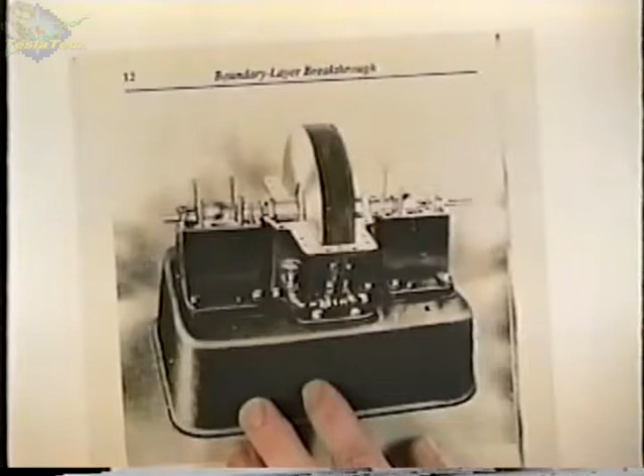In this photograph here, you see his basic turbine. This is out of the first publication that we put together. It was called Boundary Layer Breakthrough. That book was published in 1990. It was the very first book in English on the turbine. So in 1990, we started the resurrection process.

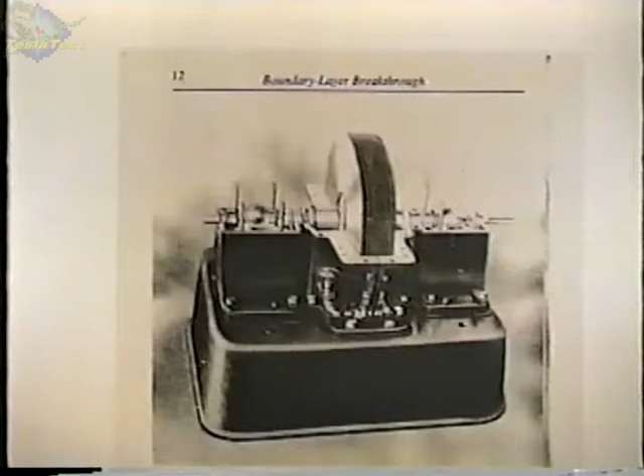We've since come out with a second edition of that, which is called Tesla's Engine. This was published in 1994. But basically, all a device is a series of disks.

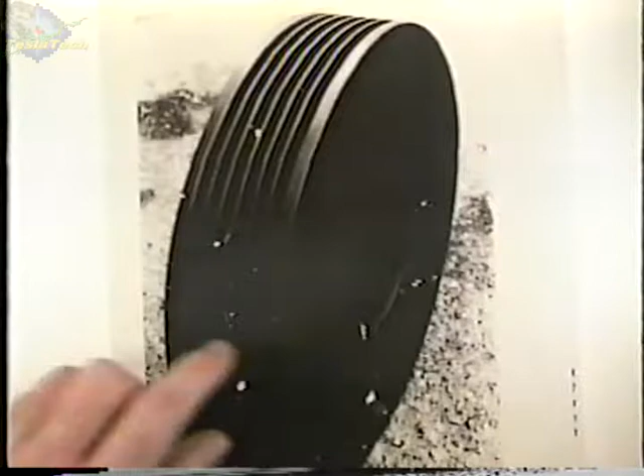You see here, this is a pump rotor, and there would be a shaft mounted on the back here, and the shaft is driven. You can't really see it very well here, but there's a hole right here.

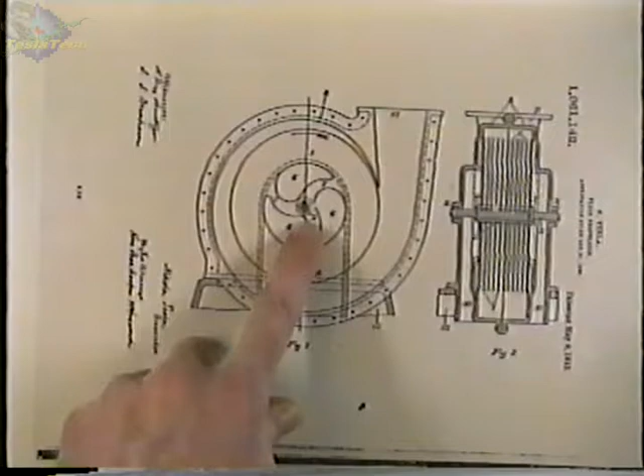In this case, Tesla has got these center spokes. These are almost never used in, well, they are never used in the industrial pumps. Why is this such a good industrial pump? Why is it the best pump that there is? There's no tight tolerances, that's true.

What's his main claim to fame? Does anybody know? It'll pump solids, right. It'll pump a solid, it'll pump a liquid, it'll pump a gas, all at the same time.

It's an amazing pump. The commercial ones that are available actually have the discs spaced apart that wide on some of the models, or wider, and it can actually pump solids that will fit into that hole. You can even pump fish. You can pump live fish. It's about any kind of solid will go through it.

There's a company by the name of Discflo that's the main action on this. They actually claim patent protection, incorrectly in my opinion, but their main patents have expired now, so there's really no more problem with that. But they've really taken the technology and proven it.

Matter of fact, Texaco claimed in 1988, when they started using this technology, that they were saving $68,000 per year per pump that they had replaced with this technology.

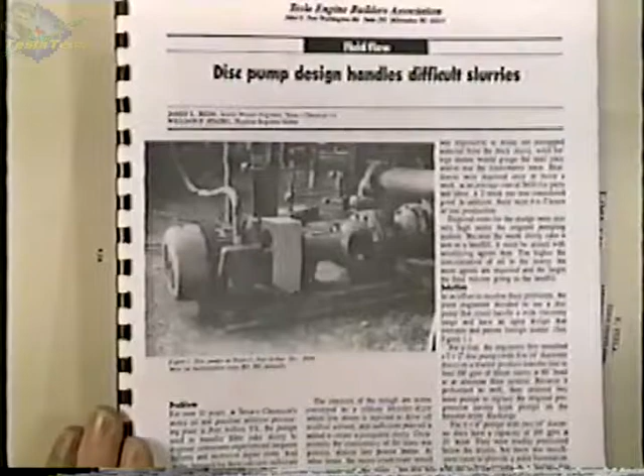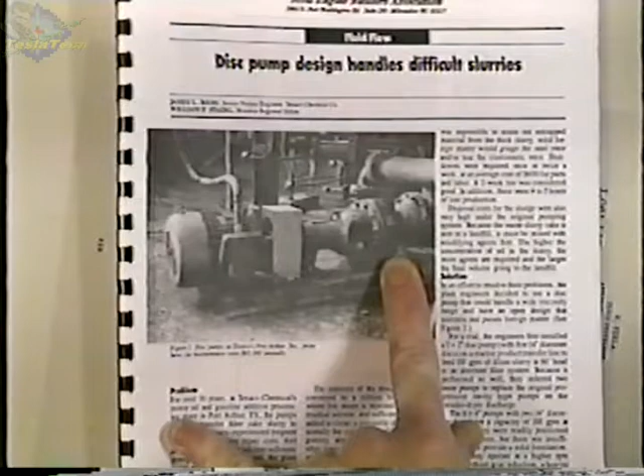This was in Chemical Processing magazine, and here you see the pump being electrically driven. There's a motor, it drives the pump. Previous to this technology, they had to replace these pumps on a very regular basis because they were pumping some of the nastiest stuff imaginable.

It would destroy their blades in their pump, because conventional pumps use blades. What else doesn't happen with this pump that happens in conventional bladed pumps? Cavitation. What is cavitation?

It's an implosion. Whenever you suck on something, what happens? The vapor pressure will... you're actually drawing a vacuum, right? And what happens when you draw a vacuum on a fluid? It starts to boil, right? If you go higher in altitude, what happens to the boiling point?

It goes down. So in these pumps, especially in applications where they have a high vapor pressure, that fluid will boil very easily with any kind of vacuum applied. When those bubbles form, the blade comes along, and what does it do to that bubble? It punctures it. Then all that stored energy that it took out of the environment in that boiling process is now released instantaneously, and that creates a tremendous implosion force that will eat away at those blades.

Every bubble that pops is eating until there's nothing left. So if you have an application where there's a high vapor pressure in your fluid, this is really the only pump that will survive, because cavitation will destroy any pump. Okay. Questions about pumping?

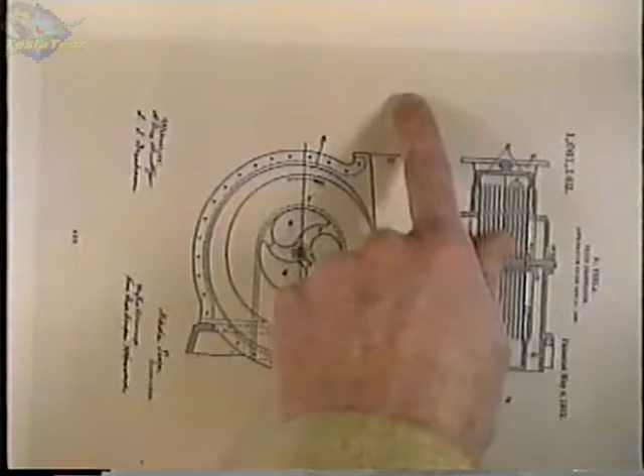So how does the turbine work as opposed to the pump? Well, the pump—go to the viewer—the pump sucks in the center. The fluid is accelerated in a spiral. It's thrown out by centrifugal force and comes out the outlet. So you drive the shaft, you have the sucking action through the center, and then it takes it out the periphery.

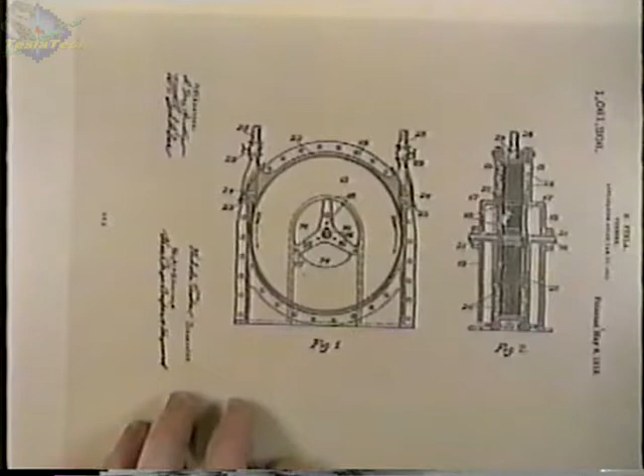And this is really all those guys went by. This is really all they had when they tried to make this device—they really didn't have any more than this drawing right here. But you can see in this, here's the nozzle coming in. High pressure fluid comes in here, vortexes around, and comes out the center.

Now there's two nozzles here. Why is there two nozzles on this? One is for reversing. On conventional bladed turbines, they'll typically have more than one nozzle, correct? They'll have nozzles all around. You can do that on this unit also, but Tesla never did that. He didn't have to. Why didn't he? Why does a conventional bladed turbine need multiple nozzles, but the Tesla turbine generally only needs one?

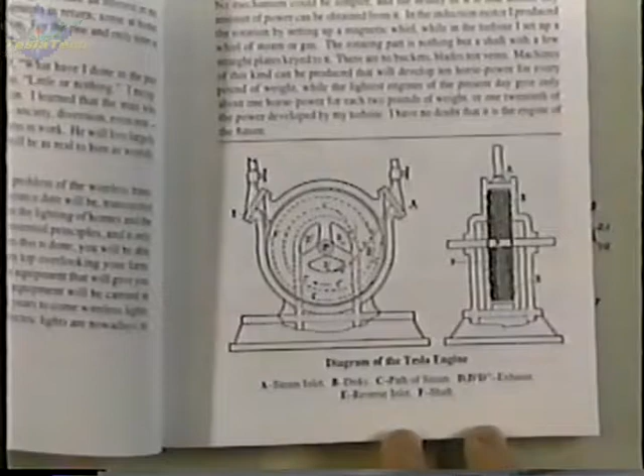In a way, but what's happening in there? You'll notice that the fluid comes in, it's going to vortex around in a circle and hit all areas of that disc. And if you're hitting all areas of the disc, do you want to have multiple nozzles? Because in the bladed world, what they do is put the multiple nozzles in there to get more action, because you're only getting action at one spot.

In the Tesla turbine, you're getting action all around. As it comes in, you get action spiraling around. It's a vortex, and it's just wringing the energy out. So there's two forces acting here. It's still acting as a pump, correct?

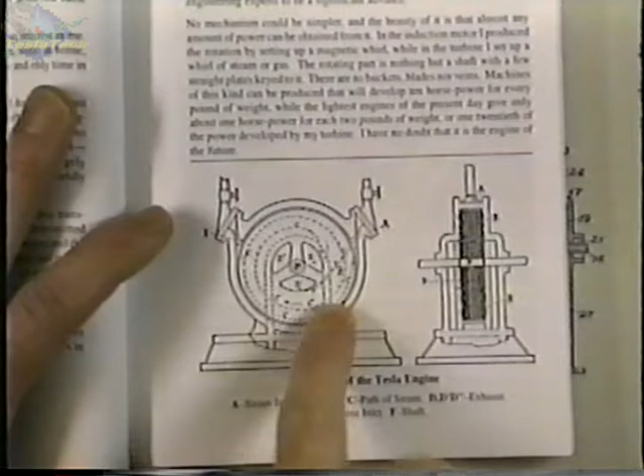It's moving around, so there's still centrifugal force trying to force the fluid out. But there's also fluid coming in trying to push the fluid in. Wherever those two energies meet is where the fluid is going to be. Right here you have high pressure at the periphery. As it loses some of its energy, it comes in to a lower point in the disc, where you have less centrifugal force, so it's always going to be in its appropriate spot. That's how the vortex works. You're always hitting all areas of that disc.

If you want to reverse, you simply close this valve, open this valve, and you instantly reverse. It's the only turbine that's reversible in that manner.

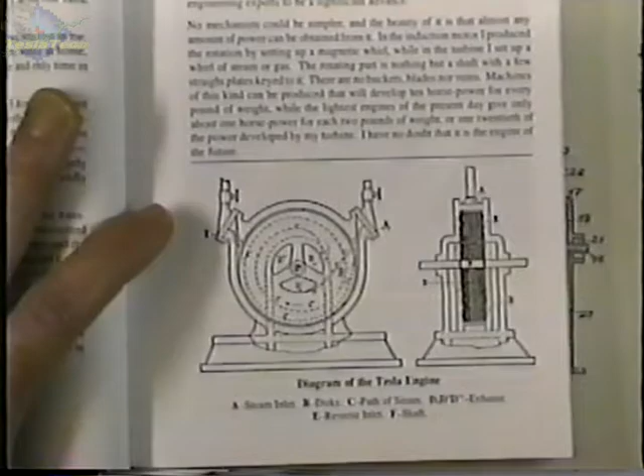With blades, you have curved surfaces. In bladed devices, the blades are curved, one after the other along that shaft. The fluid comes in and hits that curved surface. If you want to reverse the turbine, you're going to have to hit the opposite side, and that's not the geometry they want to hit, so it doesn't work.

In relation to the amount of head it can handle, and also compared to piston pumps, vane pumps, those kinds of things, how does it compare? The question is, how does this compare in providing pressure?

To get high pressures out of this device, you'd have to stage it. You have to actually go to multiple stage pumps if you want high pressure for pumping. And that's been done.

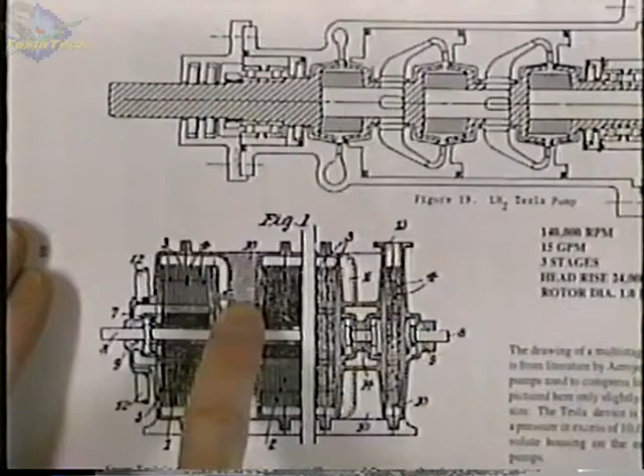Tesla actually got a patent for multiple stage pumping. You'll notice here that there are multiple stages. You go into one, it comes out, goes into the other, and so on. This empty spot means you can insert as many stages as you want.

Aerojet built one of these for pumping liquid hydrogen. Very similar, you'll notice - input here. Of course, they changed it; they took its center geometry out, it's just a hole there, but it comes in here and goes through the stages and comes out here. On this, they were able to get 140,000 RPM. This is just a 1 inch rotor, 15 gallons per minute, 3 stages, head rise to 24,000 feet at 1 inch diameter. So it can pump some pressure.

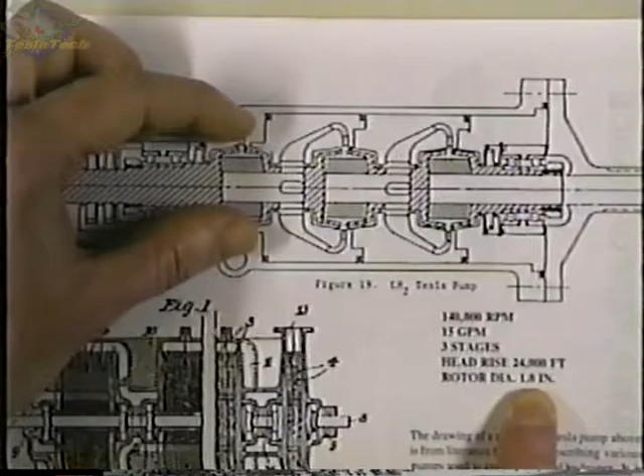Any other questions? How is the force transferred to the rotor? Is that purely friction of the fluid over the surface? Good question - how does the energy transfer from the fluid coming in to the rotor?

It's not friction. If you have friction, what do you have? Heat, and heat means loss. There's a professor at Arizona State University here in Arizona who did a lot of work on this - he was the premier academic looking into this, and he measured rotor efficiency. He claimed that the efficiency could be over 95%. Tesla claimed 98 plus. So it can be very efficient if built properly, and that's the key - it has to be built properly.

You haven't yet answered how the force is transferred. You're right, I haven't answered that question. The force is transferred by two elements. Here's a turbine disc, and the way this works is by adhesion and viscosity.

If I took a drop of water and put it on this plate, what's going to happen - is it going to fly away? No, it's going to stick. That's called adhesion - it has a relationship with that plate electrically, it wants to be there. It sticks, and it doesn't fly apart into separate pieces and stick all over the disc - it sticks together, it's not only attracted to the disc, it's attracted to itself. That's called viscosity - the more it sticks together to itself, the thicker it is. So it works by two concepts: adhesion and viscosity.

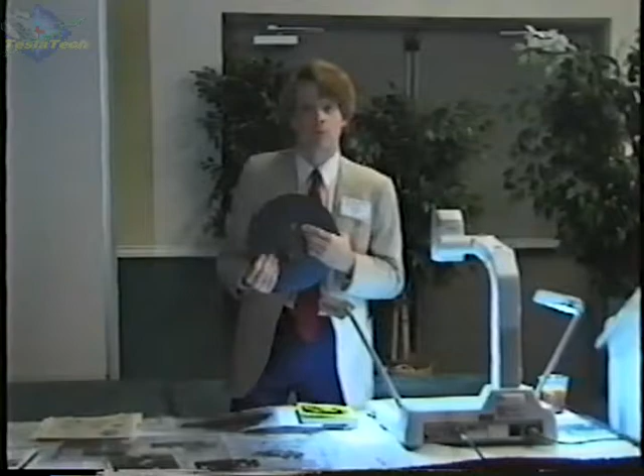Are you familiar with the work of Jake Bussell? I'm very familiar with the work of Jake Bussell. In fact, the first book I did, called Boundary Layer Breakthrough, was much related to his work. At that time, Jake was the only person really doing anything with turbines, not correctly. He was the person involved with that 1977 Conoco test that failed. I thought he had some very good success with geothermal. No, that's not true. I have the video from that geothermal test, and there was plenty of steam coming out of that well, but it went right to the turbine and it did not turn. I'll explain why. Is he still alive? No, Jake has passed away.

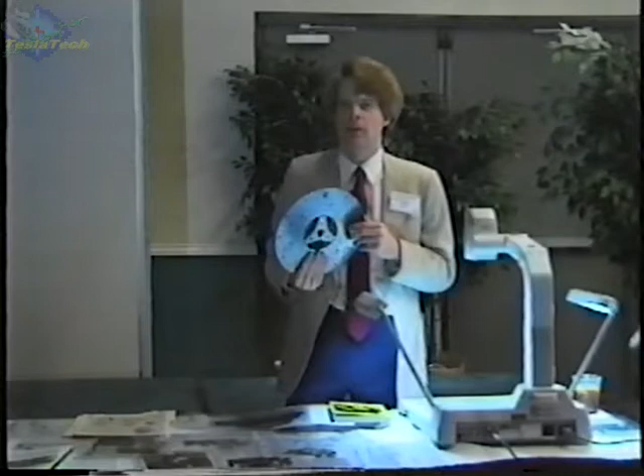I have to give Jake a lot of credit, though. Even though he didn't do things correctly, he was our inspiration. He was at the 1984 Tesla, was it? 86? At 86 he spoke at the Tesla Society, and that's what got me going. So I give him a lot of credit, even though he wasn't into Tesla. That's the problem — the only success that's been had on this is when we go back and give up our ego and say, okay, I don't know anything. What did he say to do? Unfortunately, that's not the way people have approached it. He also worked on a jet engine and compressors using the same technology. Yes, he was working on jet engines, and none of that worked. None of that worked.

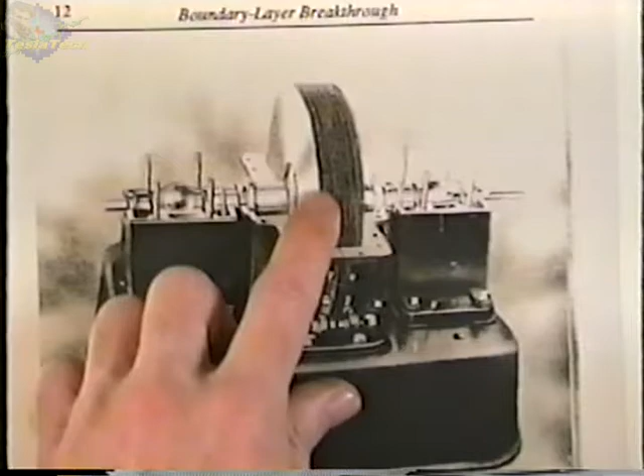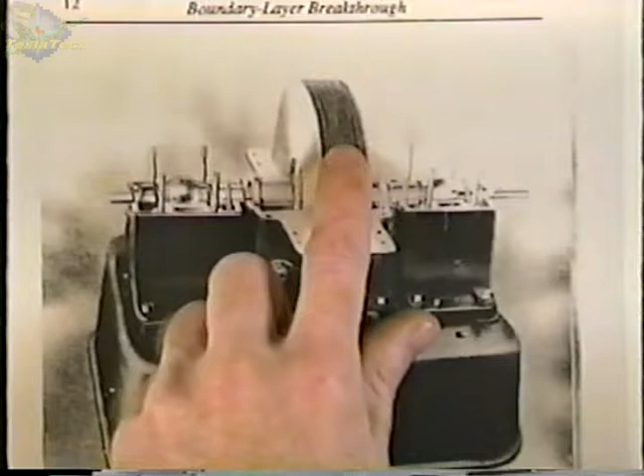Why? Good question, we're coming to that. Why did Jake not succeed? These little holes are one of the reasons he did not succeed, amongst other things. But you'll notice here that there's a pattern, a bolt pattern around here. And when these discs are put together, it's not real obvious — go to the overhead, please — it's not real obvious that these geometries exist if you look at the pictures, because they've been polished out. Remember, you want these discs to be as smooth as possible. Not that it would matter on the end disc so much, but you can't see them. In there is a series of these pins, and there's bolts that go through here. This thing is actually all bolted together.

When this turbine is started, if you don't put pins in, some things happen. For one, it has no starting torque whatsoever. The maximum torque on this thing is developed when the speed of the disk turning is half the velocity of the fluid coming in — that's maximum torque. In other words, you could have this lightly loaded, and this thing will spin up to whatever speed is coming in. So if you're putting in 2,000 feet per minute steam, this thing will run up to 2,000 feet per minute peripheral velocity. Now, if you load it, what's going to happen if you don't increase the fuel supply? Fuel supply is kept constant, you put a heavier load on it — what happens? It's going to slow down.

Well, it's going to keep slowing down. But as it slows down, it fights back. It keeps trying to turn that thing harder and harder. It resists it, because what's happening is you're developing additional torque. As it slows down, the torque goes up. So it tries to self-regulate itself, it tries to get back up.

But when it finally hits 1,000 feet per minute, what happens? It gives up. The torque curve just drops. So the torque keeps increasing, increasing, increasing, and you get to 50% velocity, and boom, it just drops off. It stalls, which is not a problem because what would you do with the fuel supply? As the load increases, you increase the fuel supply to maintain the RPM, like any other turbine.

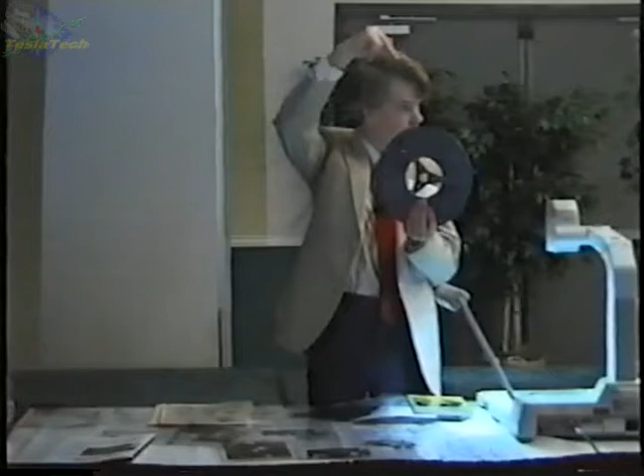In this, what happens? It's also going to be a pump, and there's centrifugal forces coming out as well as centrifugal forces coming in, right? They're going to match, and when it hits 2,000 feet per minute, it's got as much pressure going out as it's got coming in. So what happens? It self-regulates at that speed, it never runs away.

It's much like a DC motor. You know how you give a DC motor 50 volts, it will go one speed. You give it 100 volts, it'll go twice as fast. You don't have to worry about having a load on it that it's going to run away. It's the same characteristic. Although on a DC motor, if you have no field and no load, it will run away because there's no counter voltage. But it's very similar to a DC motor in its torque characteristic and its speed.

But you said something about it won't start. Exactly, thank you for getting me back on track. The pins here give you that element of starting torque. These pins now act as an additional torque-producing element in this turbine, and they're essential. If you don't have these pins, you will have drastically reduced performance.

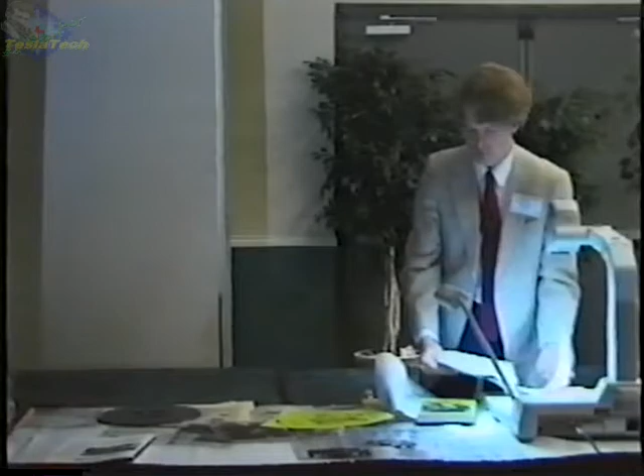What happens on these pins has been recently uncovered here in an article, the overhead please. This is an article called The Physics of Tesla Turbine, which was in one of our recent newsletters. And this is Sonny Intrican here, who is the premier turbine builder at this time. He has really been instrumental in getting this into the commercial market.

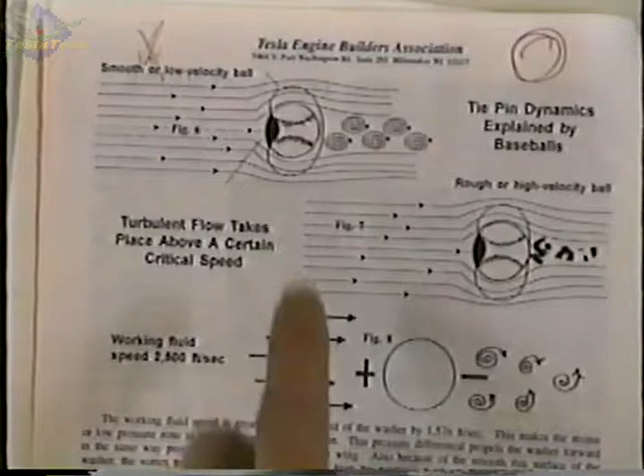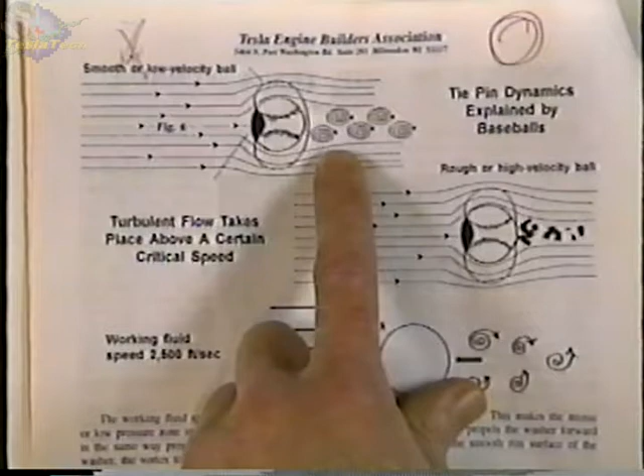But anyway, he's looked at this and he says, well, you know what those pins do? They're much like the physics of baseball. When you have a baseball going through the air, what happens is you get these vortices formed on the trailing edge. And these vortices actually are imparting torque to the discs.

So they're actually a torque-producing element in the disc. And when you have a starting condition, you aren't going to have any torque from the disc, so you need those pins. And with those pins, it has tremendous starting torque. You could take your hand and put 100 pounds of pressure on that turbine, and you can't hold it back. So it does have starting torque.

What happened in that Conoco geothermal test, when they had the steam blowing through it, there were no pins. So there was no torque. That was one of the problems.

As long as you reduce the load, you wouldn't need a starter, it'll self-start. You could have, and that's actually in that Conoco test - you see a guy went over and took the load off and hand cranked it, and it did start. But there were other problems.

Do the pins affect the efficiency? Yes, without those pins... increase the efficiency - you're increasing the torque transfer from the fluid to the discs, to those trailing vortices.

A lot of people think the pins would be in the way. Tesla thought so too at first. If you look back at his original documentation and know what you're looking for, he didn't explicitly say to put pins in - that was one of his secrets. I think he was trying to keep that to himself because the patent drawings don't show it either. But if you read how it progressed, how suddenly there was a huge increase in performance and efficiency, that's when he added the pins.

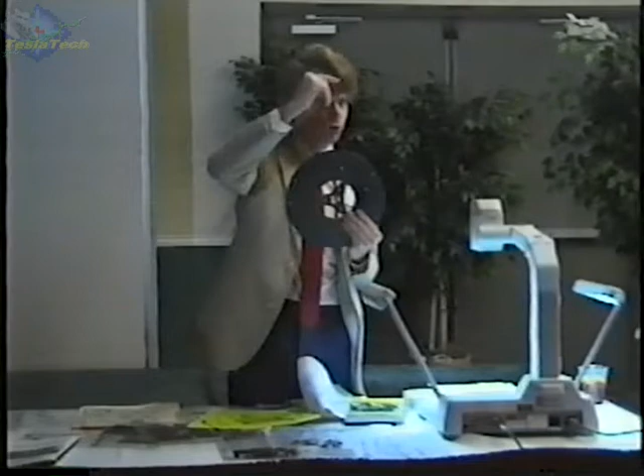It's a different geometry of fluid flow. You have vortices forming in the trail end, not just random turbulence. It's not a random effect, and it's not like sticking blades in - you could do that, but then you'd have a bladed device. The pins don't get in the way; there's still enough room for the fluid to vortice around. You can't have the pins too close together either - that's a mistake. Some people think if some pins are good, let's add more, but it doesn't work that way because you need that action area behind it to get the effect.

How do we know how many pins to use? Because we just follow Tesla's drawings. So you might ask, if he didn't put those in the patent drawings, how did we know what was going on? Well, it turns out he had buried that information in the National Archives in the patent wrappers. When we dug those patent wrappers up and looked - I was sitting down trying to make CAD drawings to reproduce these turbines.

I was looking at the patent wrappers and the drawings. They're called assembly drawings, which actually show the pieces that were put together. And lo and behold, I'm going, what is that? As I looked closer and closer, I realized those were pins. Once you knew what you were looking for, it became obvious, but everyone had missed it until we came along and discovered it.

Once we realized that was one of the missing things, we drew our drawings out. We just had faith at that point that Tesla was on the money - he believed in this, so we were going to try to follow through and make it work. We put the drawings out and said, anybody want to build this that's a machinist? We started the Tesla Engine Builders Association in '93, and put out a membership manual that included the drawings - a 90-page manual that's been updated since.

It said somebody's got to build this. So these guys down in Louisville, which included Sonny Intrican, who I mentioned earlier, got a hold of this. Back to the overhead, please. And they built a turbine. Their company name - Sonny's company has been through a lot of machinations, but it's called Intravac.

He's a turbine vacuum pumping expert, so he's a perfect fit for this. I came across another website - I'm not sure if it was them or another - that claimed they made some important improvement. Oh, Frank Germano. Yeah, company name GermanoIndustries.com or something like that. He was a member, got the information from us, basically. He's talking about some new information that's come out, which I'll talk about in a minute.

This is an actual disc out of the 11-inch turbine we have on the overhead. Back to the overhead. You can see this disc right here is actually a template for the discs. The discs in this turbine are a 32nd thick; this one is more like over a 16th. What they did is they wanted to save money because getting the disc laser cut with all these individual holes would have tripled or doubled the price. So they made this template, put it on the disc, and used the drill holes as a guide. Once they were done, they gave me their template.

But this turbine you saw on the overhead is a high-power turbine. It's got 34, I think, discs in it. It's way overbuilt - it's a 1,000 horsepower turbine if you could get the volume through it, with a minimum of 250 horsepower.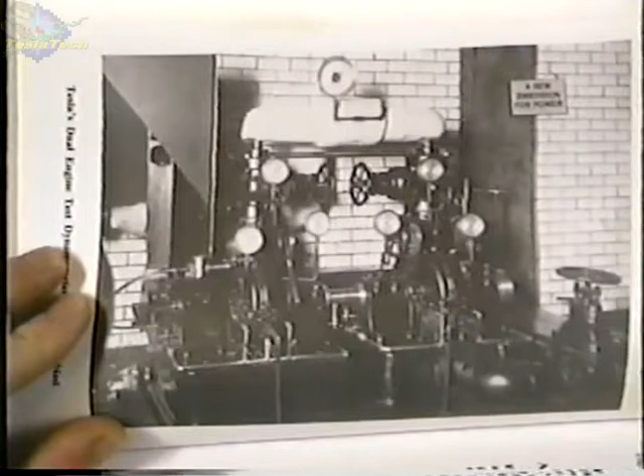Here's a picture of it with the covers installed. You notice these handles here? One's up, one's down — those are the reversing handles. So if you want to reverse the turbine, you can reverse these on the fly, making one the driving and one the driven right on the fly. And of course, the spring between here will twist depending upon the amount of differential in speed and torque between the two, right?

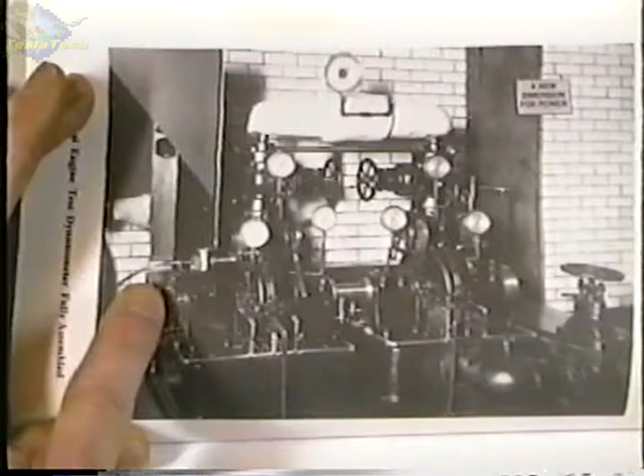Now what he did then, over here he has a light beam. See up here he's got this light source, that shines down and goes onto the shaft. It will go off the shaft into a mirror, come back off a series of mirrors and come off this other side here. That would come off then onto a calibrated piece of paper, and when it's not running, you calibrate that beam so it's at zero.

As that spring twists, what's going to happen to that light beam? You got a mirror mounted here, and you've got a reflection off of here. As the spring twists, it's going to shift. So you're able to read horsepower, and as long as you maintain the speed constant, you can read the horsepower directly off the scale. Tesla's the first one that ever made a dyno like that, to my knowledge, but he needed to get accurate readings, and this is the way he did it.

This turbine developed a maximum of 330 horsepower under test, and the limitation was the steam supply. Also, these were old cast housings — he was afraid that these castings where the steam came in would give. So he was afraid to take it up above 185 pounds of pressure. At 185 pounds of pressure, it was developing 330 horsepower. When he ran it at lower pressures, down at around 125 psi, it would develop 200 horsepower.

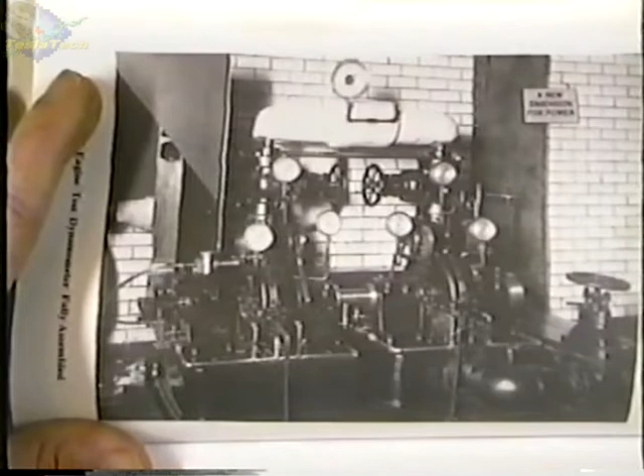And that's with a free exhaust — that means there's no vacuum, there's no condenser on the exhaust. You always have better performance with a condenser. But with 125 pounds at the nozzle, free exhaust, he was developing 200 horsepower, and that's where he rated it. He rated everything very conservatively.

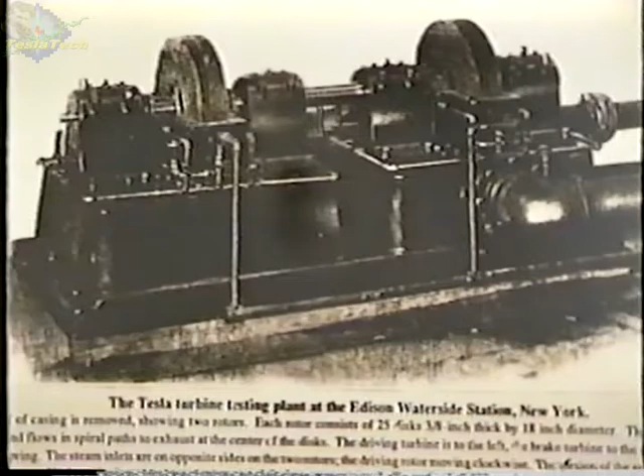Okay, so the question was the spacing. Yes, the spacing does go up with diameter. Now, what we're suggesting that people build is not the 11-inch, because what's the problem with these smaller diameter discs?

As the disc becomes smaller, what's going to happen? We talked about the spacing, but what else has to happen? Speed has to go up. That's the other problem people have had with this: they'll hook this up typically to a 3,600 RPM motor, direct drive, with a 10 or 9-inch or even smaller diameter disc, and they expect to get any kind of efficiency out of it. It ain't going to happen.

The commercial bladed turbines that are small diameter run upwards of 60,000 to 150,000 RPM. The same thing has to happen here if you're going to get efficiency out of the device. The problem with that is you need either magnetic bearings or specialized air bearings to make that kind of thing work properly.

Bearings have been the biggest headache. So how can we get away from that headache? We make the disc larger.

As the discs become larger, what happens to the peripheral velocity? As this disc gets larger, what happens to the speed at the periphery? It will increase, right? As that disc gets larger, that speed out here is going to be higher than the speed down here. It's got to be — it's going a further distance, right? And it's got to be faster.

So that allows us to use the same velocity steam, but reduce the speed of the turbine. What we're suggesting to people, if they want to build one of these — and we've got plans now — is for a 21-inch device. A 21-inch device running at about 10,000 RPM will be very efficient. When it runs to full load, it would only be running at 7,000 RPM. And of course, the more lightly you load the turbine, the more efficient it becomes.

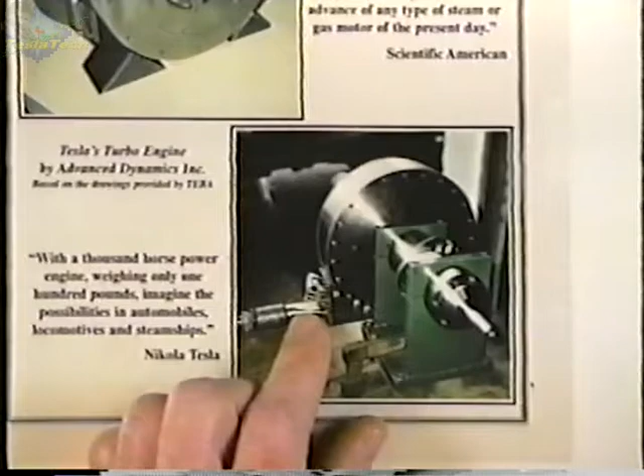We had one experience with the 11-inch. Go back to the overhead, please. There we are — here's the 11-inch all put together. Here's the rotor, here it is in the casing. It has a variable nozzle, which has worked real well — this is a nozzle you can turn in and out to change the width of the gap, so you can tune it to whatever pressure you have. That works real well.

But... anyway, I've lost my train of thought now. What was the question?

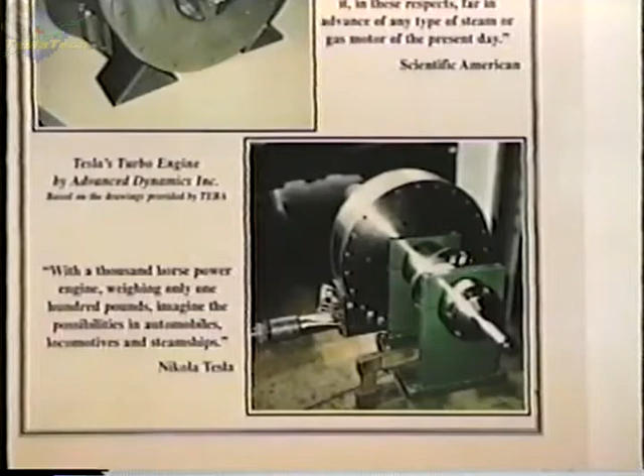Talking about slowing it down. Oh, we had an accident. That's right, we had an accident with this machine. You see here how it's clamped to the table?

Well, what happened is they did not use the bearing frame that we recommended. We recommended that they go out and get a standard pump bearing frame and rework it. Instead, they made their own. They had nothing but problems with their bearings and bearing frame. The biggest problem with this turbine was not the rotor, it was everything they changed. Everything that they deviated from our instructions and Tesla's instructions turned out to be a problem.

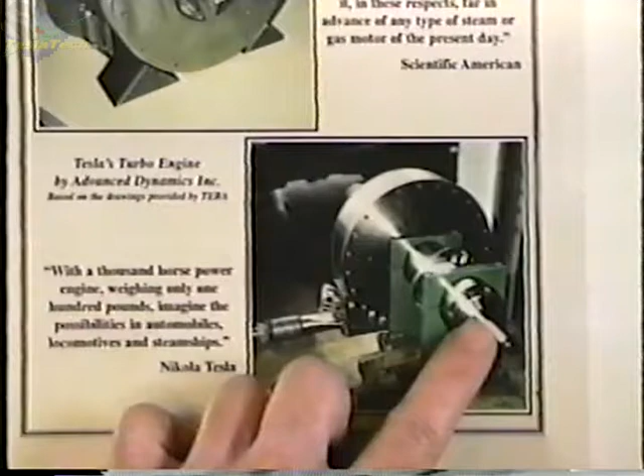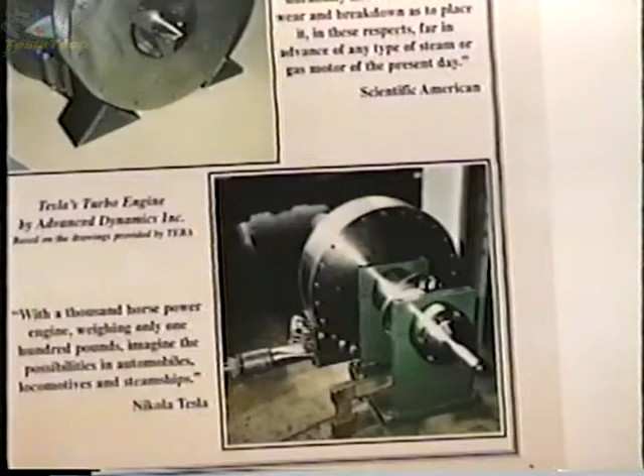But anyway, what happened is this shaft, their bearing shifted. The shaft moved forward. When the shaft moved forward, this came forward and contacted the housing. And when that contacted the housing, what do you think happened? It didn't just slow down, it stopped. It's clamped to the table, right? That clamp held, picked that whole table up into the air and slammed the turbine down onto this face. Just picked that thing right up and hammered it. It had stopped so quickly that the shaft twisted.

But when it hit, it didn't damage the rotor. All they did is pull the shaft out and put a new one in, and they were in business. But it's just a good thing that nobody was standing between there and the floor, or that would have been the end.

Since we're talking about adhesion and those types of forces, how do you keep the boundary between the housing and the discs such that... there is no blades, well our discs... from the housing being a restraint? The question is, how do you prevent the housing from being a restraint? You just simply leave an 1/8 inch. We're recommending an 1/8 inch. That's enough. Side to side? Well, the side to side clearance you want to have as close as you can. They call that run out.

If you have a series of discs here, what will happen is there'll be a slight wobble in the disc as it turns, and you don't want to have it too close because as it wobbles, it will hit the case. So what you want is about 30 thousandths clearance there, and you'll typically get a run out of about 10 thousandths. If it hits the housing on the end, it'll make a terrible scraping noise.

I was talking about the steam. That's what I was talking about. The steam, you're saying it adheres to the stainless steel disc, and that is what is giving you your torque. Will the end plates act as a brake? Is that what you're saying? No, the housing. The steam is adhering to the housing. How much loss of energy do you have there?

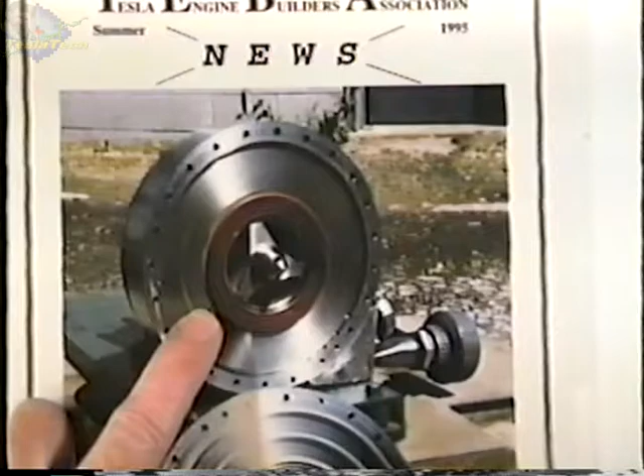You're talking about the labyrinth seals? Right. Can we go back to the overhead again? Yes, Tesla's original patent drawings, he showed something called labyrinth seals. You can see, we put them in there in the first unit because we didn't know if they were really required or not, but they're in the patent drawing. You can see them here. Not really, but they're there.

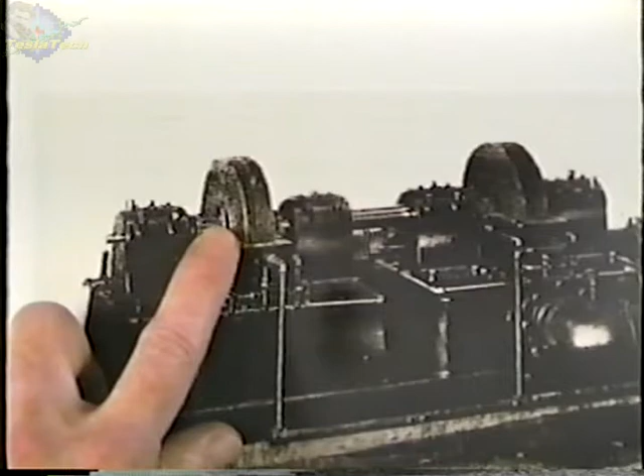It's little rings that go around here. What happens is you have a ring here, these slots, that mates into these here - it's called a labyrinth seal. But when we investigated, well, you look at Tesla's original units, there were no labyrinth seals. So we figured out what he did - he simply made the nozzle the correct size. And this labyrinth was not made properly.

This labyrinth here, that's another mistake they made. They didn't want to have this big chunk of stainless that they had to machine down because it would have been expensive. So they took a cheap route and put a groove in the end disc and put this phenolic in there. They machined the geometry into phenolic and then installed the phenolic into the end disc.

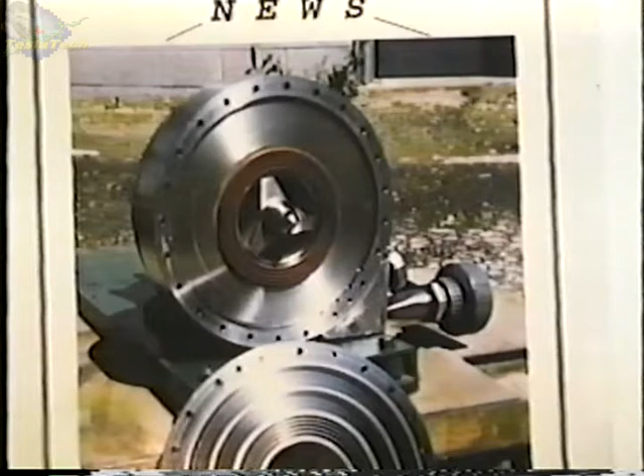Well, as soon as they put high temperature steam in there, what do you think happened? They didn't have their nozzle right. They had their nozzle all the way across. So fluid was getting down between the housings here and the end disc. There was fluid getting in there, and here's the labyrinth trying to block that flow. But that phenolic did not last very long. As soon as they put high temperature steam on it, it just blew into pieces and out the exhaust. But they've been running it since without the labyrinth, and there is some loss because their nozzle's not quite right, but it works.

It's in all these holes. One's in the center. All the ones around the periphery have support pins or bolts. It could be rivets or bolts. We typically suggest that people use bolts because it allows you to take the thing apart. If you use rivets, you're kind of stuck.

The other major problem that people have had with this device, which was not included in this original one, is when you run it on steam, especially saturated steam. Tesla ran these on saturated steam. What does saturated steam mean? Wet steam. In our utilities today, what kind of steam do they use? Superheated. How come they use superheated?

Right, these little droplets hit the blades and they're like bullets. They'll destroy the blades. So in our power plants, they can't let steam turn into saturated steam. This turbine loves saturated steam. And if you're a home power producer and you get yourself a small boiler, you've got enough problems with a boiler as it is without having to worry about your turbine being torn up by the water and the steam. They do put superheaters on these small boilers that are used with turbines, but with this, you don't have to worry about water in this turbine.

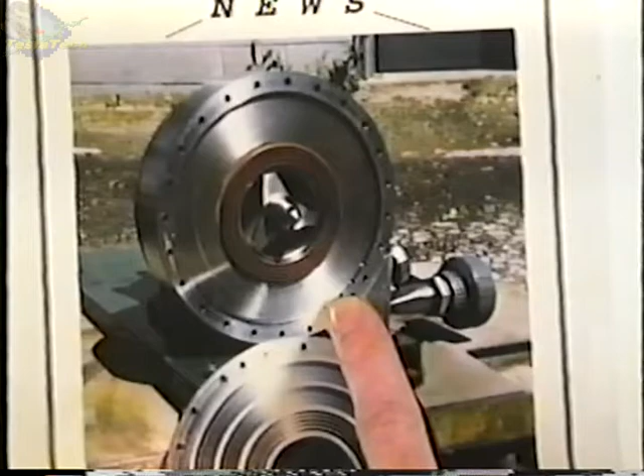But there's a problem with water in a turbine because at the nozzle, when the saturated steam comes in, a lot of water will occur right there. The water will come out and it won't go into the rotor. It's just too heavy, so it's thrown out to the periphery. A lot of people said, well, the turbine would be great if you could just get rid of that water in there, because what do you think water in there does? It acts as a brake.

As a matter of fact, one of Jake Purcell's turbines went to Lawrence Livermore Lab, and they tested it on steam. Guess what their efficiency numbers were? It was less than one tenth of one percent.

Terrible efficiency. What you have to do, and it's kind of counterintuitive, is drill a big hole in the bottom of the case so that water can drain out. People say, well, wasn't that going to cause pressure loss? That's what I would think too, but that's not what happens. The fluid is coming into the disc, it's inside, and you don't have any appreciable loss out of that hole at all.

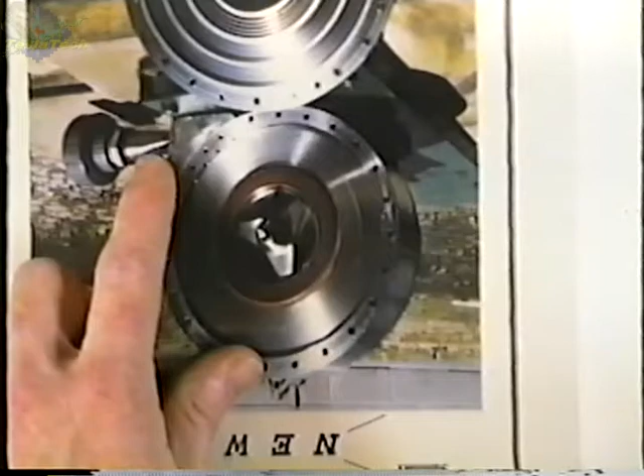You have one or two pounds, and that's just enough to push the water out. But the nozzle pressure might be 100 pounds. They've modified this since, but the nozzle would be up here and you'd have the hole down here. So by the time this fluid comes in, it's already vortexed out. The water flows out the hole at just a couple pounds of pressure. You don't lose your pressure.

Why doesn't the water just go in? It's too heavy, it can't get into the rotor. The rotor's got two forces, forces out and forces in, and it's just too big. So it's pumped out to the periphery and out the hole.

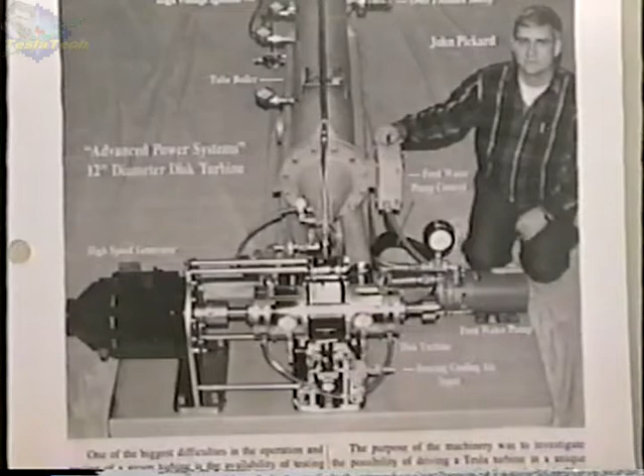If the water changes from a gas to a liquid while in the plate, then it goes out through the hole? Right. If the saturated steam converts from water, or condenses out of suspension from the steam inside the rotor, it will go out the center hole. Inside of the incoming steam. Right. Once it's inside, it can condense and it'll be forced out. But most of that condensation happens at the nozzle.

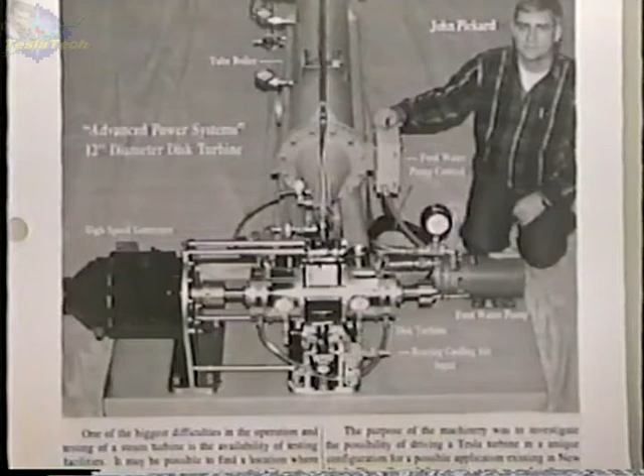Will this act as a vaporizer? The answer is definitely - we found that out quite by accident. I'll have to get back to this. I can show you an overhead, from our last newsletter.

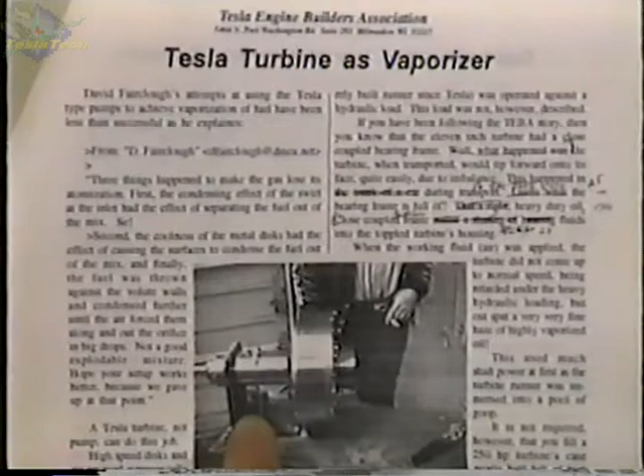Tesla turbine as vaporizer - there's the 11-inch turbine again, same one. When you look at the geometry of this thing, it's very heavy on this side and there's almost no weight here. So when you transport it, what do you think happens?

The thing drops, right? Well, this thing was full of oil. So when they transported it, it tipped forward, sitting on its nose, and all the oil ran into this case, filling it halfway up. So I put air onto this thing, and lo and behold, it just vaporized that heavy oil and spit it right out. Took a while, but it eventually cleared itself. Yes, it will act as a vaporizer.

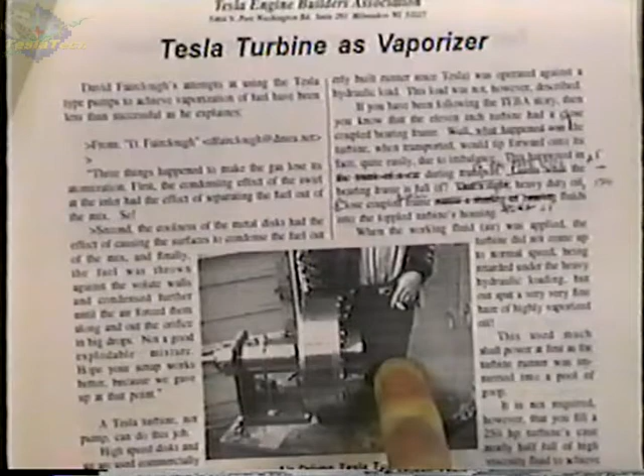Question: with the water coming in from the saturated steam, why wouldn't the still liquid flash to steam? Yeah, I would expect it to flash to steam. It doesn't. We know it from empirical evidence.

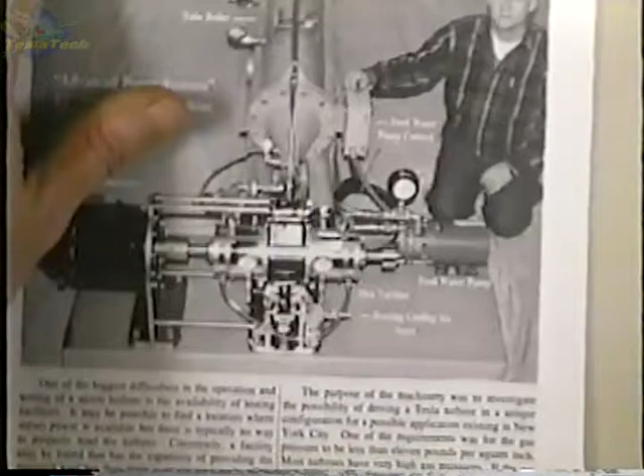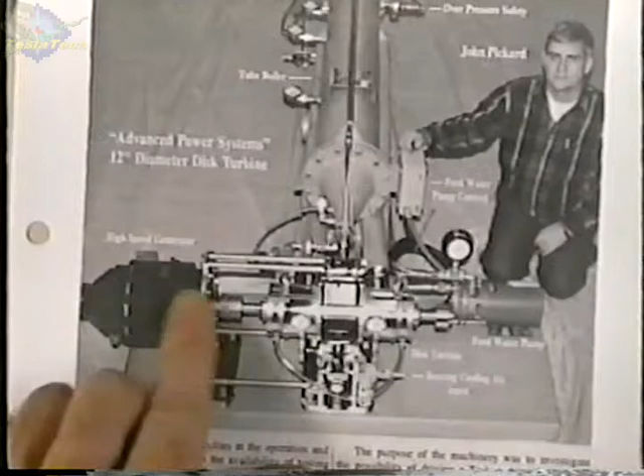Actually, the first turbine that we discovered this effect on, that we could do this, was this one here. This is John Pickard, one of the guys that developed that first turbine. He made his own steam boiler feeding the turbine, then had a surplus B-52 generator here. Here's the boiler feed water pump, and if you look on the bottom here...

Yeah, you can see it, there it is right there. There's a valve, right there, and that's hooked up to the bottom of the turbine. Initially they put a valve there with a little handle, a little ball valve, because they thought they were having problems and didn't know what to do. So they said, let's put a hole and open it up so we can clear that water out. When they discovered they could leave the valve open, it didn't matter - that's how that discovery was made.

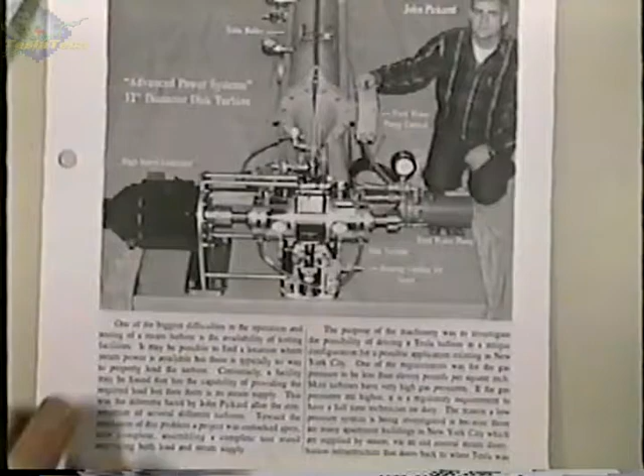In 1978 we had a group of people at Fermilab on a project, and the problem was solved with a device using an offset rotary expander, vapor motor, swing sliding vane with a steam vapor generator. We had steam at 14 seconds. We used a non-polluting fluorocarbon to produce the steam, and maintained the external temperature of the rotary expander at a constant temperature by putting it inside the vapor generator.

This resulted in the adiabatic expansion principle of the steam. When we came in at 12 o'clock with the steam on the rotor, which would be almost zero tolerance, at 6 o'clock we had a way to exhaust that vapor into the next chamber. So we had a two-stage rotary expander motor, external combustion, with a vapor generator using a non-polluting fluorocarbon, which had better thermodynamic properties.

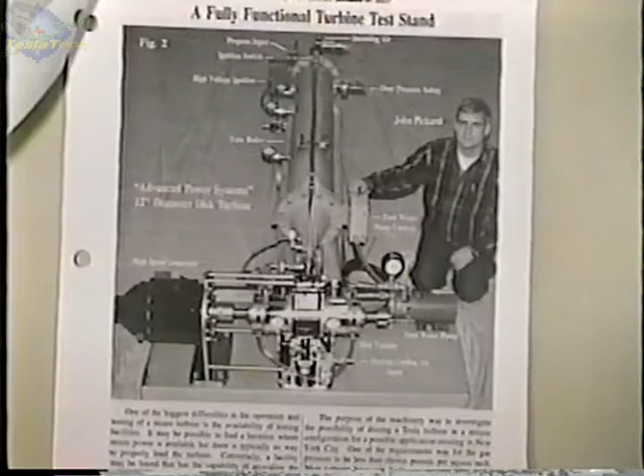And where was this experiment done? Well, it was after our back room project at Fermilab. So what were your results? This was done at Fermilab, and the results were excellent - we ran out of money and it's just sitting on the shelf right now.

So for the benefit of the video who can't hear you, one of the gentlemen in the audience says that this was built at Fermilab as a... Don't say that. Well, you said it. But anyway, it works - that was incredible.

We had it at 0 RPM with 80 PSI using air - 0 RPM with 80 PSI with air, 600 foot-pounds of torque. You had that torque range and broke your torque wrench at 600 pounds of torque. Did you have the pins? Yes, we did, we had it ratcheted, and it was the most incredible thing.

So he's saying to overcome this problem, use an external housing, and get heat there and keep it from going into saturated steam. You can manifold some of the steam around it. But in this technology, it's a different technology.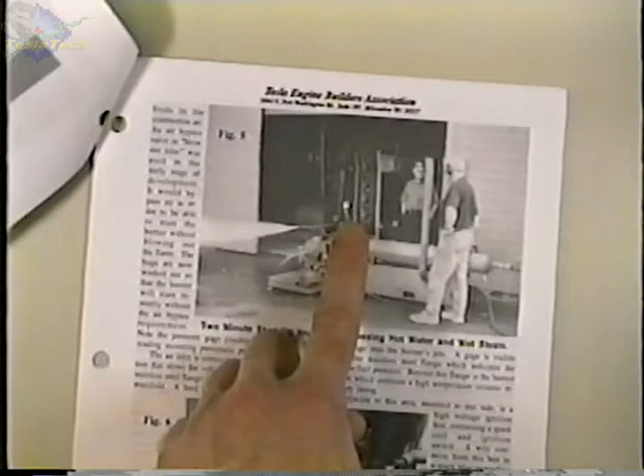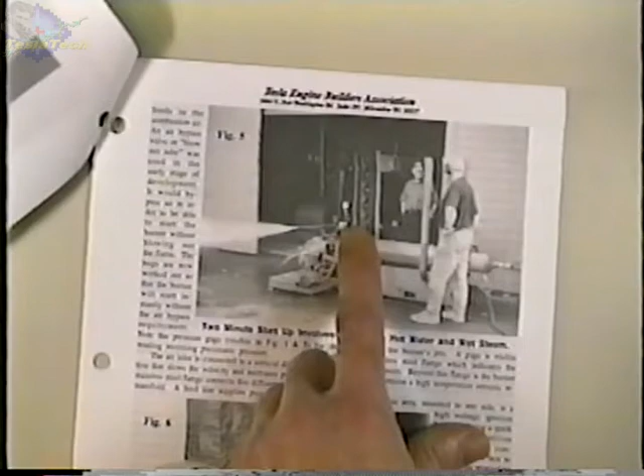This is the startup procedure. Initially, you fire up the boiler and pump all the water through there to make sure you have nothing but water in the steam boiler. Then you start to get steam as the thing heats up, close the valves, and put it to the turbine. It's a 2-minute startup.

What was his efficiency on that? The efficiency of the single-stage turbine is actually approaching that of small single-stage piston engines. In the world of steam, small-scale steam, pistons are still the most efficient. This is the only turbine that can come close to the efficiency of those small-scale units.

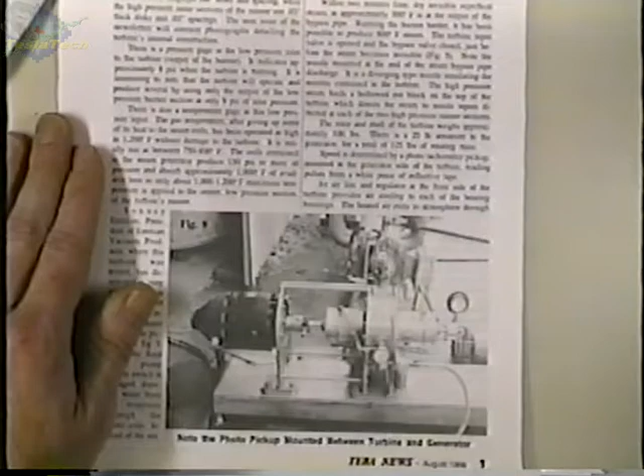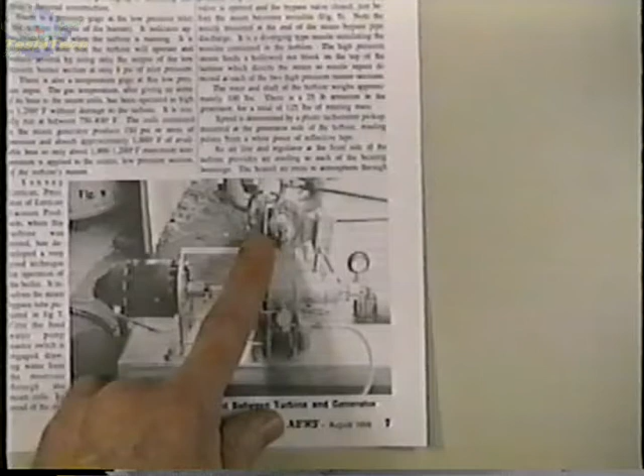This unit, like most things John has built, is way oversized. It's got too many disks for the amount of steam they were using—they only had about 10 horsepower worth of steam, and again, there's a 250-plus horsepower turbine. That's not the way to do it, but that's the way he does things. So it's still a work in progress.

Sonny Entriken, who I mentioned earlier, built one of the first high-power turbines—this is a 24-inch diameter runner. He's the guy that wants to follow Tesla to the nth degree and try to make it work. He's reproduced this, and he's got enough interest now that this is going to hit the commercial market. They've got enough investment that this is actually going to be put into commercial applications.

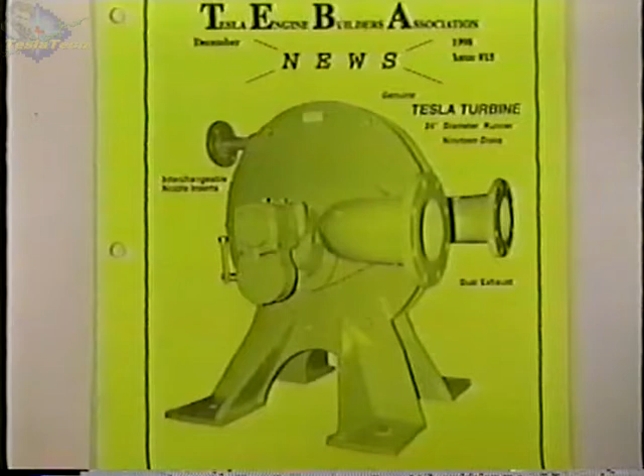And that's been the problem—they can't point to anything and say where it's been used. But now that we're getting the first olive out of the bottle, it's going to take off.

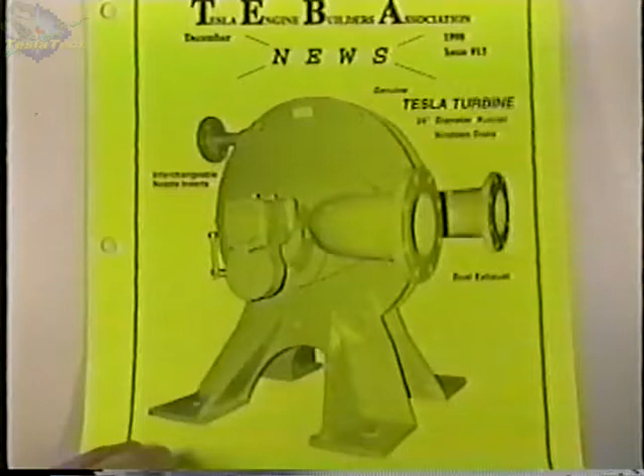Okay, I guess we're running close to time. Could you comment on what you feel the best applications are? Well, one of the best applications for this is geothermal heat recovery.

Tesla in 1931 wrote a thesis called Our Future Motive Power, where he promoted this device for geothermal. There's tremendous geothermal potential in this country, not just in geothermal hotspots. To make this work, all you need to do is sink a deep shaft. Tesla said this technology would be good for geothermal at a remote home site. So the only thing holding this back is an economic way to sink deep shafts anywhere.

But in prime geothermal lands, it's even better. The advantage of this is you can take the worst garbage salt brine steam, like we have in the Southwest. We have lots of geothermal potential, but it's dirty. You put a conventional bladed turbine on there, and it's going to be destroyed.

So what they have to do is go to a binary system, where they take the steam out, have a primary, and it heats a clean fluid on the secondary. That feeds the turbine. There's a lot of loss and complication in that. Whereas this, you just take the turbine and set it right on the geothermal source and blow all the crap through it. You don't care—it's not going to be hurt.

Jake was telling me about some experiments where they let the material from the Salton Sea, which is particularly nasty, hit air, and they got all kinds of precipitates. When they came up with the idea of keeping a closed system, never letting it go to air, it came through completely clean—without particulates?

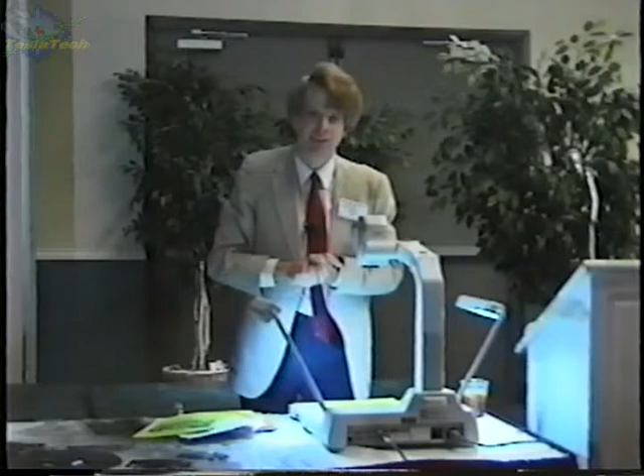That's not true, is it? No, when they opened up the machine later, there were no accumulations in there. Initially they had accumulations because it was reacting with the air. Oh, okay—so the recovered water was just pumped straight back into the ground. Jake Purcell told you when they used this at the Salton Sea... I don't think it was ever tested there.

It was Fallon, Nevada, where it was tested. He told me about some test of that kind, that the result came out real dirty.

But as long as they don't let it hit air, there's no buildup of deposits inside the turbine, because they have a re-injection well. It comes through the turbine and it's re-injected.

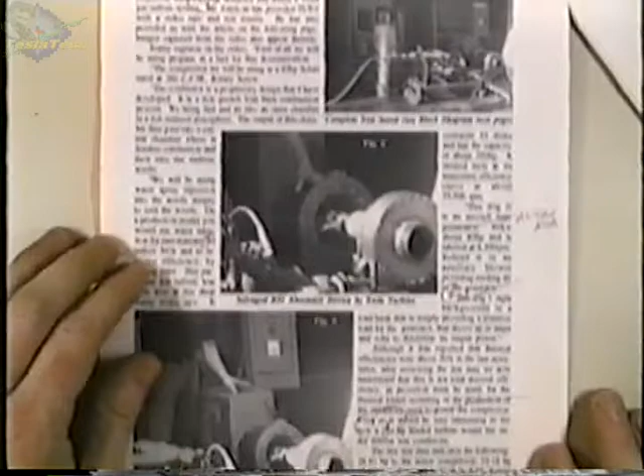Interesting. Other question? Has anyone built a fuel-fired turbine? Good question. Well, we go back to Sonny Entriken again. He has built a gas-fired turbine—this is a gas turbine test stand.

What he has done is he has a bladed compressor here, or this is a rotary screw compressor, that feeds into the turbine. There's the 11-inch turbine again. That thing's been through hell and has lived. They put extreme temperatures to this turbine without damage.

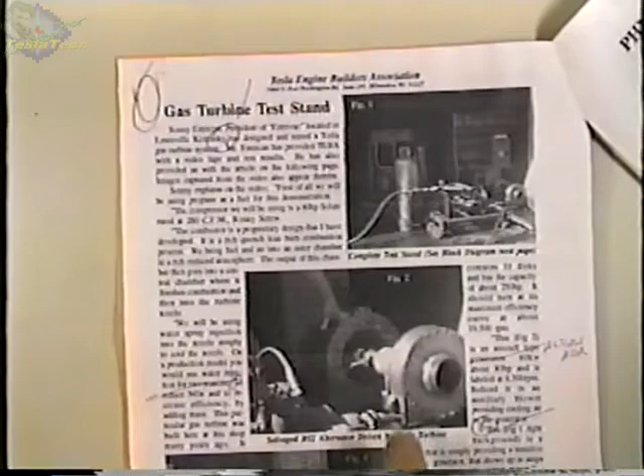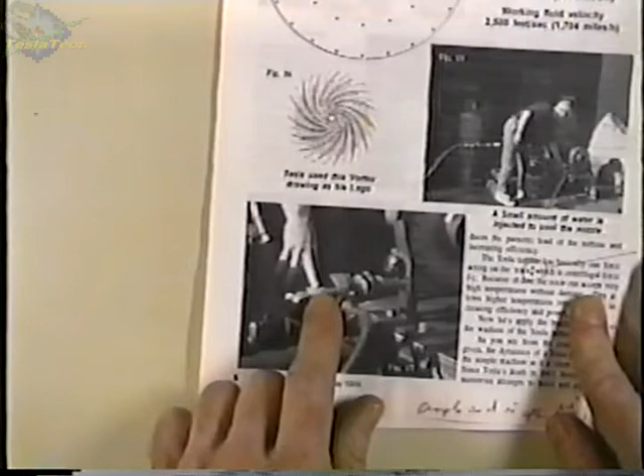You'll notice there's a line coming in here to the turbine—they do use slight water injection on this. There is water injection here to keep the nozzle cool, just for the nozzle, so you don't melt the nozzle. But the turbine has never been destroyed by heat.

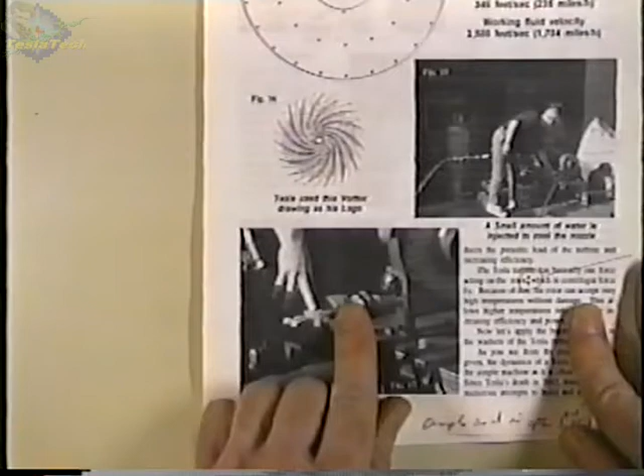They did a mistake and they cut the water off during a combustion test—this is direct combustion now, running on propane, with hot gases coming in here from the compressor. And what happens, the water supply got cut off, and that overheated and destroyed the nozzle and melted the discs. It didn't melt, it distorted the discs.

All the discs on the very outer edge, at the very outer edge by the tying pin, when that very high temperature came, it warped the discs on the outside. What if you did that to a bladed turbine?

Well, on a bladed turbine, you have active moving blades and stationary geometries, with very close tolerances, and if there's any distortion in those blades, you'll have a catastrophic failure. In a Tesla turbine, like Sonny says, it doesn't seem to know that they're distorted and doesn't seem to care. It does not affect performance.

So you can put so much heat on these discs that you totally warp the outside edge, and it doesn't affect performance. As long as you keep your water injection in there, that won't happen. But they've proven that extreme temperatures, it does not die.

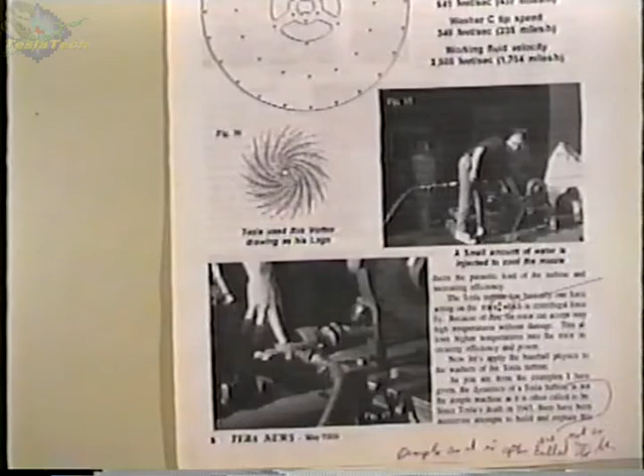It keeps living. I wanted to ask you a question about pumps. On a single-stage pump of vapor material, about what would be an expected ratio of the pressure on the intake side of the pump versus the pressure on the outlet?

If you want to come over later and look at the pumping curves, there's just way too much information to give you all at once, but we do have all the pumping curves. Go to the overhead, please. You can get all those numbers—it's all there, the commercial ones that are available.

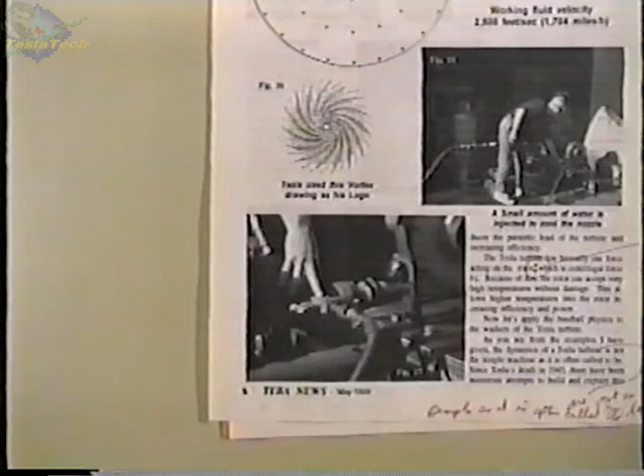So if you want to build, this is the cheapest thing you're going to have. We figure our 21-inch turbine is going to be about $1,000 to put together if you do it yourself. So the information is the cheapest thing—don't skimp on the information if you're going to build.